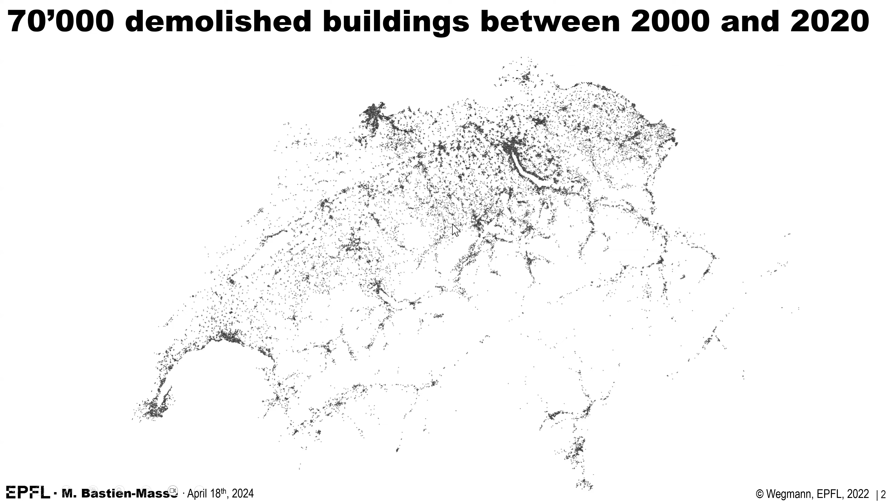This heavy demolition leads to the fact that a large part of the construction and demolition waste is made of concrete. In Switzerland and around Europe, the number is approximately the same: about 1/3 of construction and demolition waste is made of concrete, excluding all excavation materials. And obviously, the best thing we could do would be to maintain buildings in place.

I'm not going to go too much into this, but this is really something we need to keep in mind. The first thing we should try to do is to try to keep the buildings in place as much as possible, transform them, renovate them, strengthen them. There are methods that exist to assess them and modify them, etc.

But when it's not possible for various reasons, because the building does not answer the needs we have, then one possibility we should be looking at is reuse. And we really need to make the difference between reuse and recycling.

Because I sometimes still hear people using the word reuse when they're really talking about concrete recycling. When we're talking about concrete recycling, we're basically demolishing buildings using the normal standard methods we all know, and then the rubble is crushed into smaller elements to create aggregates. These aggregates can then be used to partly replace natural aggregates in new concrete mixes. This is an interesting and valuable solution to value the concrete rubble.

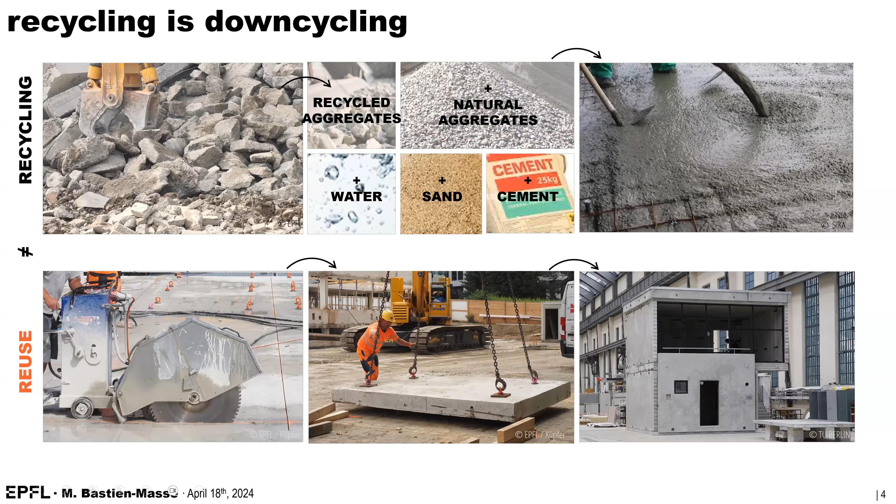This is not exhaustive, because probably some projects exist that were never published about or never publicized, but we could at least find 50 examples of built projects where concrete elements were reused. Most of those projects come from Europe, with only one or two from the US. Most of them actually come from Germany, the Netherlands, and a bit from Finland and Sweden.

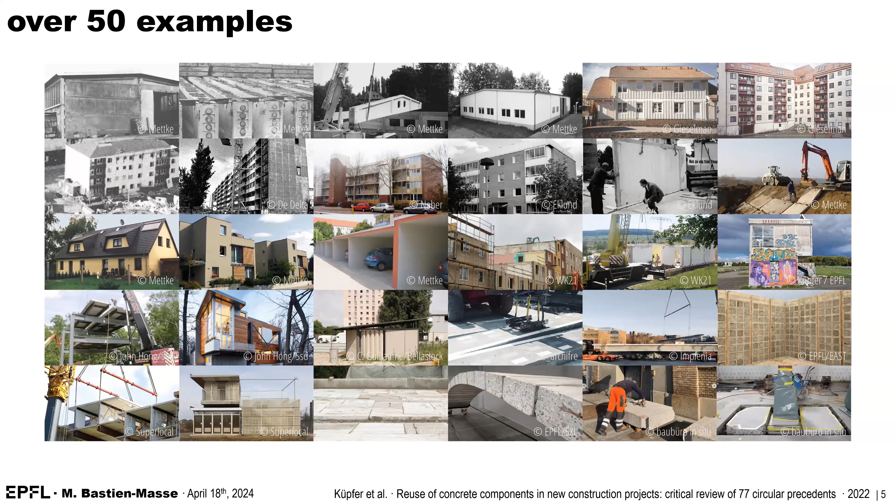And most of them concern precast elements. Why precast elements? Because it's much more obvious to deconstruct a structure made of precast elements, since the joints are already predefined and you can just deconstruct the building in a reversed way compared to how it was originally constructed — deconstructing by following the construction steps in reverse.

This is one of those large-scale examples. It dates back to the 80s, in the Netherlands, and it concerns an existing building that was under-rented, so a lot of the apartments were empty. They decided to deconstruct and make smaller the first floor of this building, and all the elements deconstructed from those first floors were reused in another city nearby to rebuild similar structures using elements taken from the donor structure.

And those buildings that were rebuilt with those elements are still standing today. My colleague went there and took this picture, so the buildings that were reconstructed are still in use.

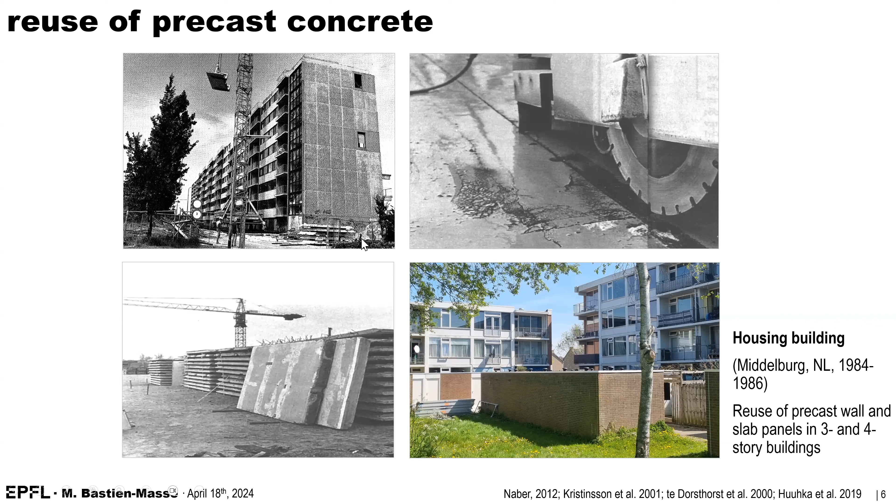But as I said before, in Switzerland we've been constructing a lot with concrete, and with cast concrete. Cast concrete really raises other questions because there you have no joints, no predefined joints. So if you want to deconstruct it into pieces, there's a whole new set of questions that appear.

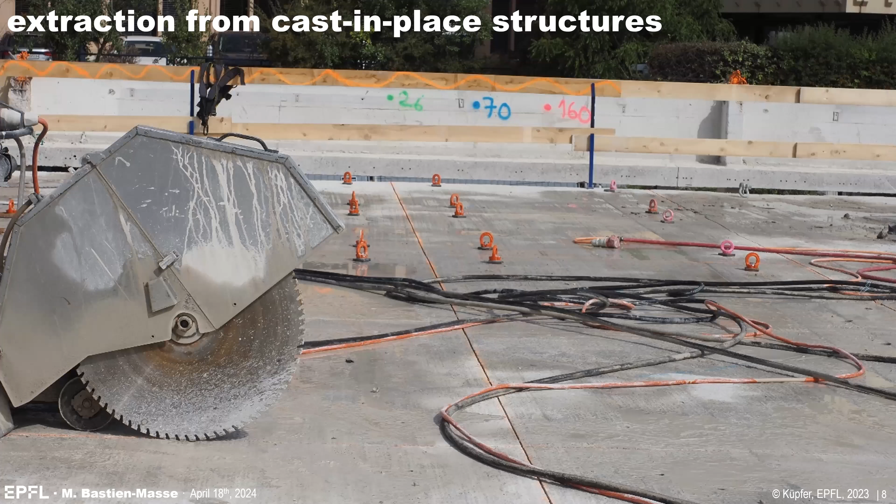First, there's the tools to deconstruct. Most of the time when I talk about elements extracted from cast-in-place concrete structures, I'll be talking about elements that are saw-cut from the existing structure, using diamond blades like the one you see in the picture.

This reuse of cast-in-place concrete structures has raised interest in the last few years. We've done many prototypes, which I'll present later, but other people have also worked on this topic. On the top left is the RE:CRETE footbridge, which was our starting point at SXL here at EPFL to kick off our research on concrete reuse. I'll talk about it a bit later.

Then there are three other projects from other people. One is a retaining wall done by the engineering office 2401, also done within a research project of the Haute École d'Ingénieurs in Fribourg. And then there are foundations done by Baubüro in situ.

And there's also this very nice example from the Netherlands, from Superlocal, an architectural office that has been doing reuse for some time, where they reused complete frames that were initially rooms in a building and used them to rebuild two types of buildings: some small house prototypes and also an exhibition.

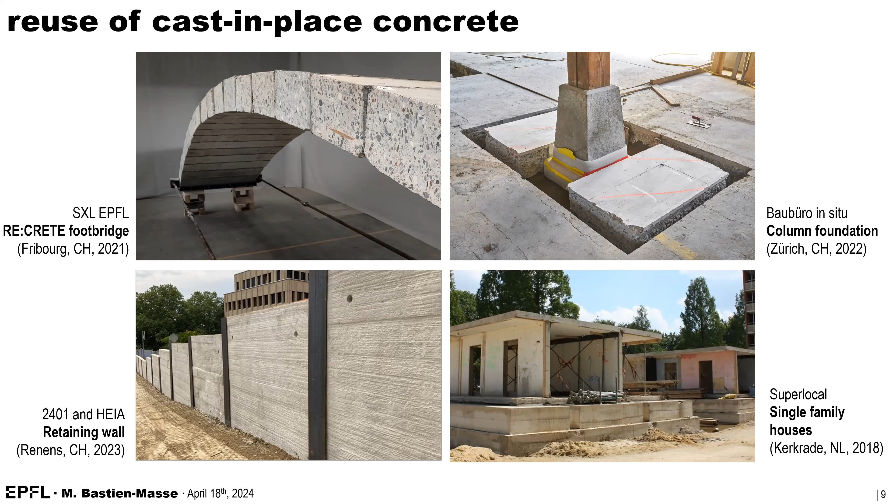This picture illustrates a student project done here at EPFL called Rebuild. The students were accompanied by us and by professionals, notably again the engineering office 2401, and they reclaimed large elements to rebuild with them. It really illustrates well the interconnectedness between the donor structure and the receiving one.

It also shows that there has to be this connection, and it changes our project phases - there's a whole new set of project phases that appear between the two projects, as well as the deconstruction and demolition of the existing structure, and also the receiving structure.

The very first step that has to be done, once a structure has been planned for demolition, is an audit of the structure - in a similar way, though not exactly the same, to what you would do if you wanted to simply transform or renovate this building. Following this initial audit, you can assess whether elements of this existing structure are actually valid and useful to be reused - that's what we call reusability assessment.

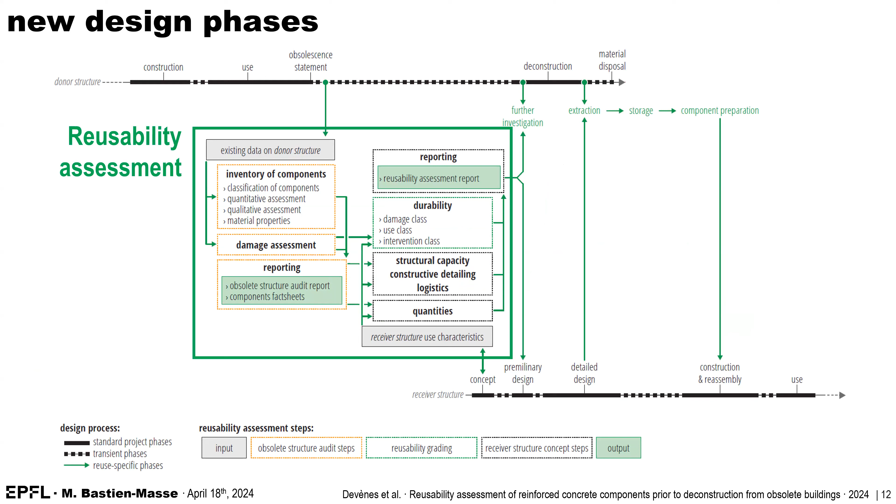So if I expand a bit more on these project phases to give you more detail: what you see here is all the steps of the reusability assessment, which we can really split between first the obsolete structure audit, and then checking the reusability. I'll start by describing exactly what this obsolete structure audit is and how we go through auditing this structure.

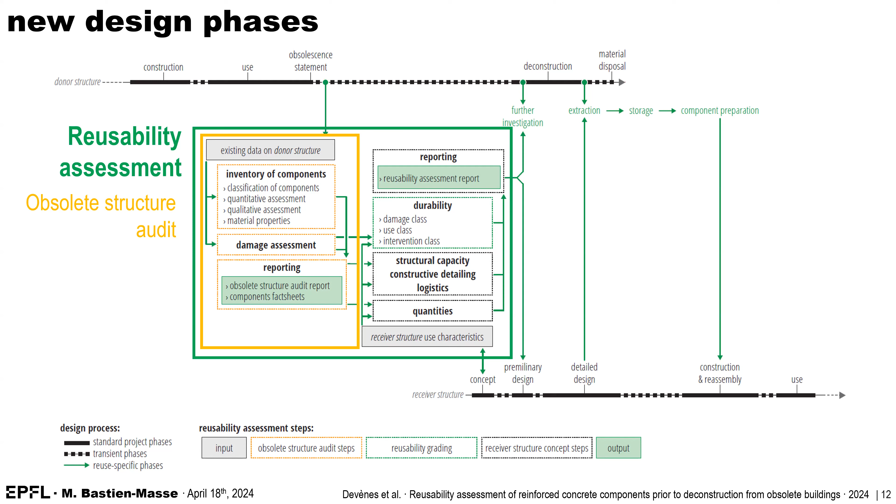So the first step, obviously, is to collect as much data as we have on the existing structure, which is not always an obvious phase.

In most cases, we'll have architectural drawings, so the basic geometry of the building. But most of the time, that's going to be the only data that we have, because it's very rare that formwork drawings or reinforcement drawings have been kept. In the same way, you won't have any info on the material properties. So you will really need to do investigation, find all this basic information that allows you to plan the structural reuse of the elements.

And sometimes you might have some issues. First analyze what you have and do a first inventory: what are the types of structural elements that you have in the building?

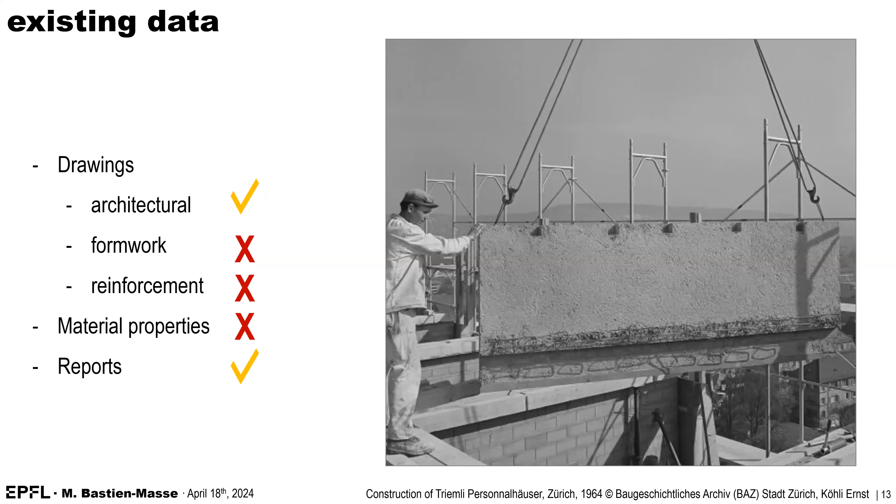Then you need to plan an investigation. These investigations can be done, and this can be investigated mainly using ground penetrating radar, but also with small local openings to verify diameters.

So more into detail on that. Carbonation is also important for topics related to durability.

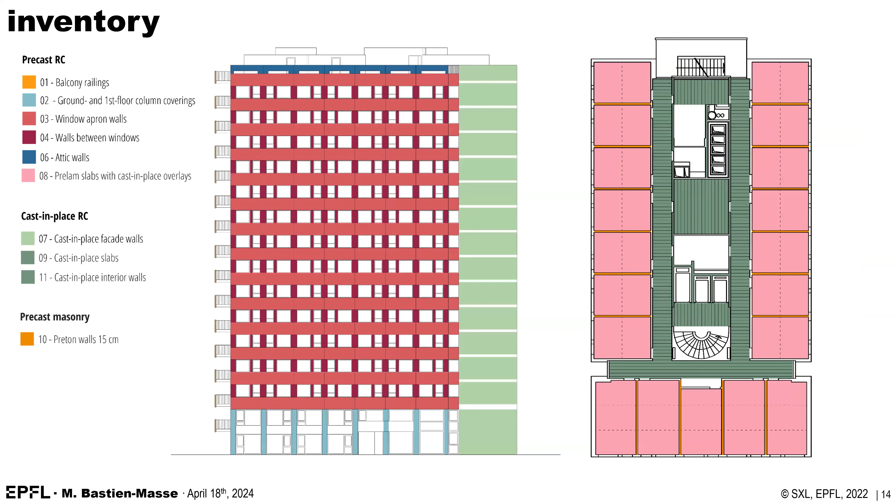Visual inspection is an important step of it. It's the step where you check whether there is any existing damage on the structure. It's something that is routinely done, or that should be routinely done, on most structures. It's done more frequently anyway on bridges and infrastructure in general.

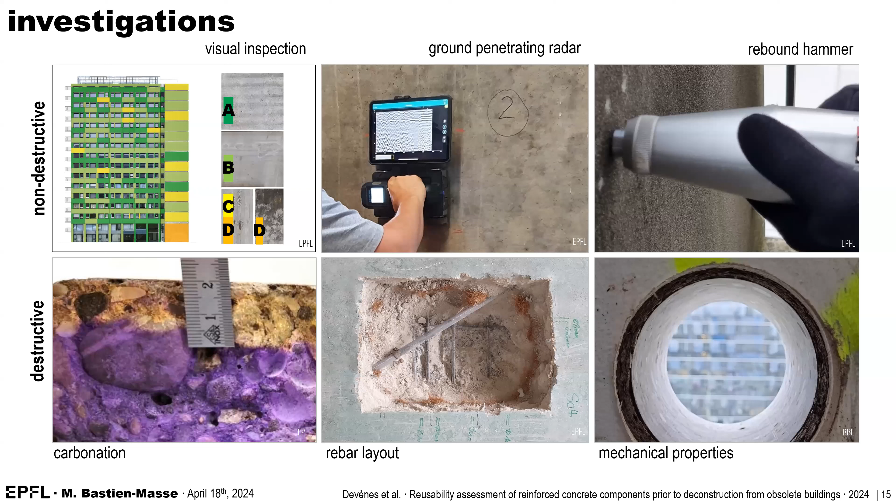And we proposed a grade scale to grade the damage that appears on the building. It's very simple. It depends on how heavy the damage is and what type of behavior it will affect - only the durability of the elements, or might it affect also the structural capacity of them?

This is inspired by what is already frequently done in infrastructure inspection.

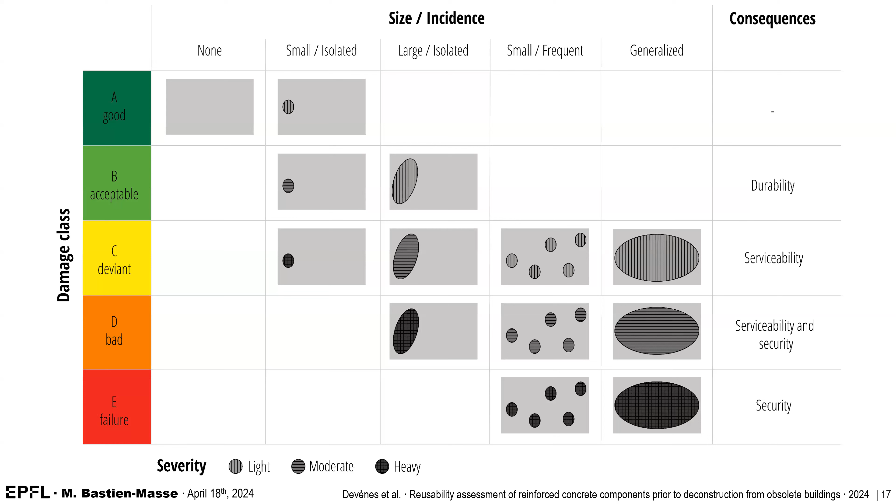Once you've collected all this data - first info on the material properties and then info on the damage and the states of the elements - with the data you collect on the reinforcement, you can try to assess what you think there is, as you do like a retro analysis to verify what is the expected reinforcement in the structure.

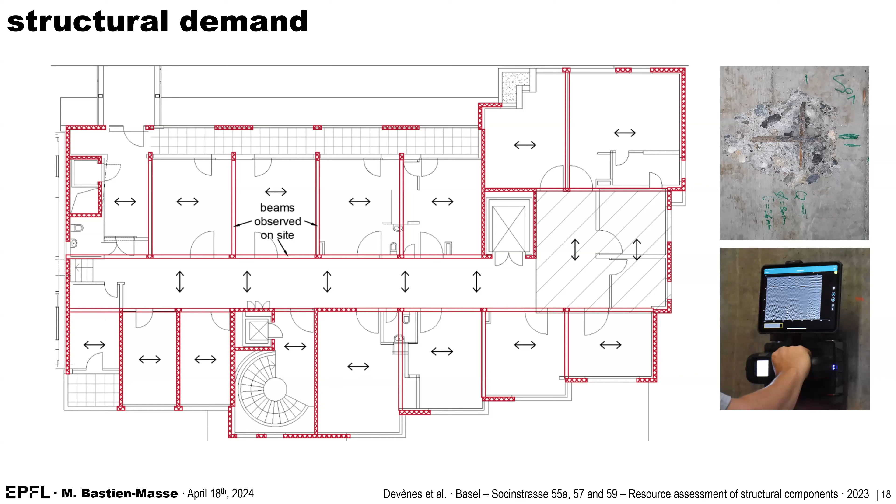So based on the measurements you did, plus maybe some small openings, which should be limited to the maximum, and on the knowledge that you have on the existing structure, the idea here is to try to find what should be the minimal bending moment resistance of the existing elements.

Once you've collected all this data, we propose to bring all this data into fact sheets. We have a template that looks like the one shown here, but the goal is really to have all the important info in one place, and then this info can easily be used by designers of the receiving building. You will really have all info regarding dimensions, structural properties, material properties.

You can also add in there any other info that would relate to any pollutant that could be suspected on the elements.

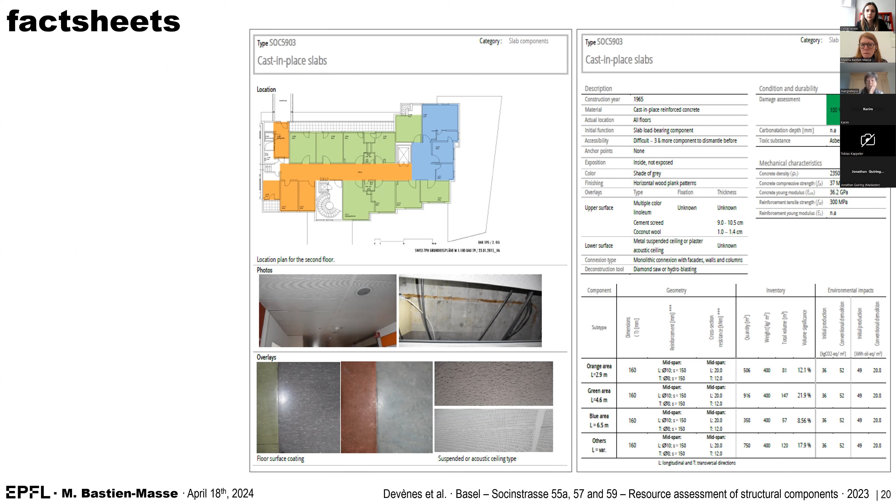Okay, so once you're done with the audit, it includes damages - sorry, the idea is to see the damage that you assessed, that you did before, and to reflect on what it really depends on, how structurally solicited the elements will be.

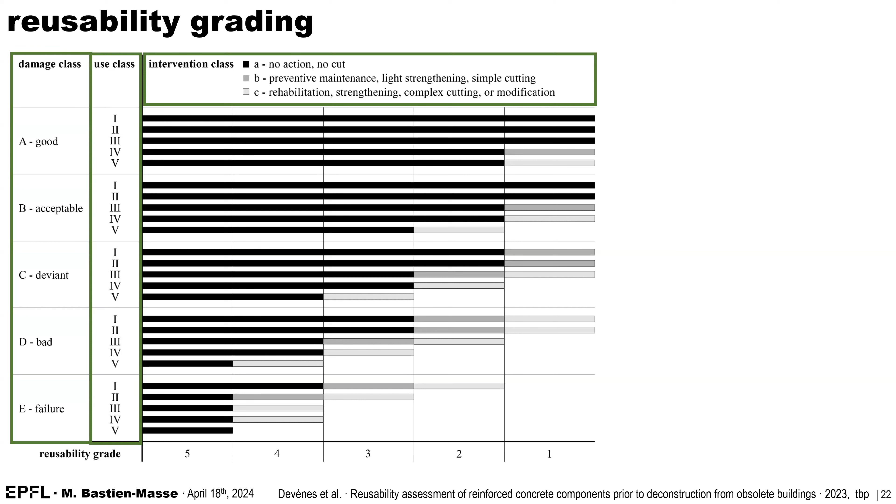So in some cases, you can have elements that will have almost no structural load, and the more you go high in the use class, the more structurally demanding the new use will be. And then you can also plan interventions on the elements, or plan action on that, and that will also give another level of scale. With those three different factors, you come to a reusability grade that you put between 1 to 5.

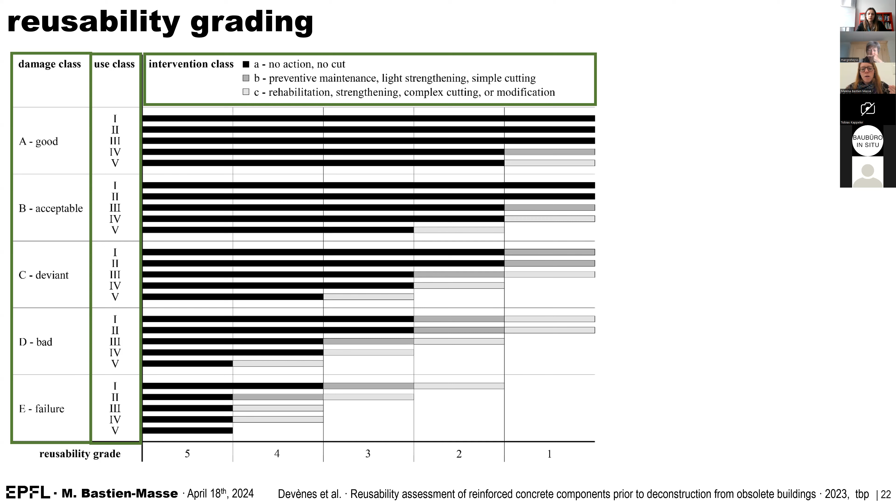At the beginning, there is no predefined joint in the concrete structure, so you really need to find how you're going to saw the existing structure and create the elements that are going to be the most useful for your future project.

In some cases, like this example, which is a building that we assessed in Basel, it can be quite simple. So you might have a receiving project that really needs very symmetrical elements, and you also have a floor plan of the donor structure that is very regular, so it's quite straightforward to define the sawing pattern.

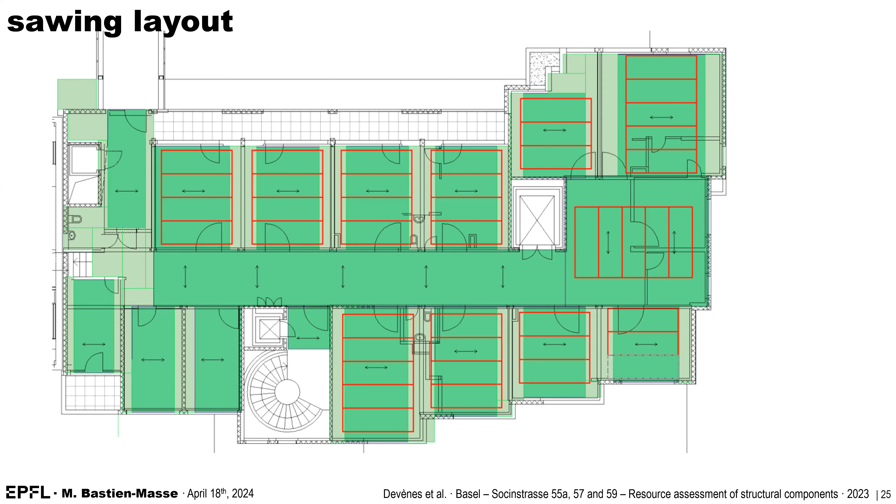But in some other cases, it might be more complex. This is the case of a case study that we did here, where we had a donor structure with structural capacity that was not so regular for the slabs, and we had a receiving building that was also not so regular.

So in this case, we had to use an optimization algorithm to find the best sawing pattern for the donor buildings, to find the best way to extract the elements that were required into the new building. And the goal was also to minimize as much as possible the strengthening that was required on those elements.

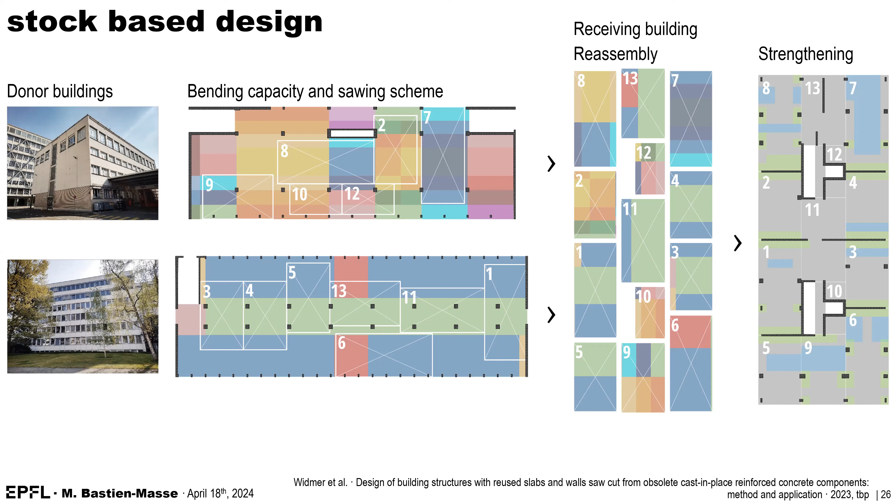This was a case study where we really tried to go all in, in the sense that we wanted to do a project where we would only do concrete reuse. All the walls, all the slabs would have been done with reclaimed concrete elements. But you'll see, as I go on, that other solutions are also possible.

And then once you've decided where your elements go, you can go into the detailed design, and that implies the development of new connections, because of course those elements that are saw cut need to be reconnected together, and this is really not straightforward.

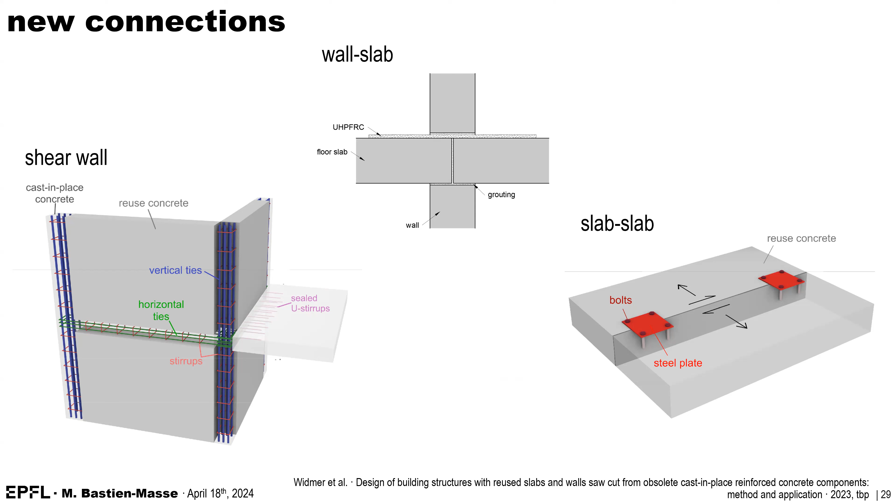I'm not going to give you too much info about those connections, because this is really ongoing research at the moment. We still need to find the best way to reconnect the elements. There's some structural constraint due to the fact that the rebars are cut, so you don't have the continuity that you normally have in a reinforced concrete structure.

So here, there's still some questions that are there, but it's really just a matter of designing those connections correctly. Once you've decided what's your sawing plan and how you're going to reconnect everything, you can actually plan the deconstruction. I said it already that it's done using diamond saws and a lifting machine.

And then once the elements are extracted, they should be inspected once more before they are reassembled in the new building to make sure that there's no new damage. Here, the non-destructive tools can be used again to verify that the assumptions you made on the structural capacity and on the reinforcement layout are correct. So it's another way to validate all the info you collected when you were doing the audit on the existing building.

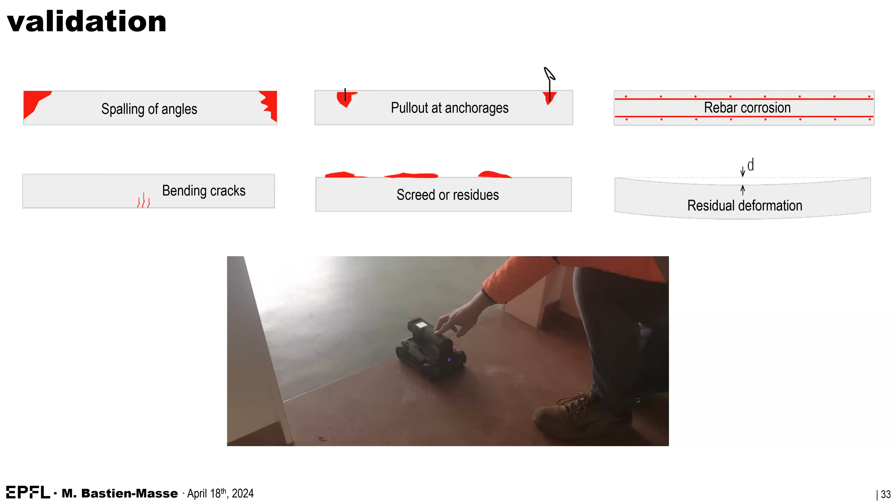So that was me trying to give you insights on the whole design phase. It was just really to illustrate how the project flow can go, and how it's a bit different from usual project flows, because you're starting from an existing structure to build a new one. It's not like when we're starting from a blank page.

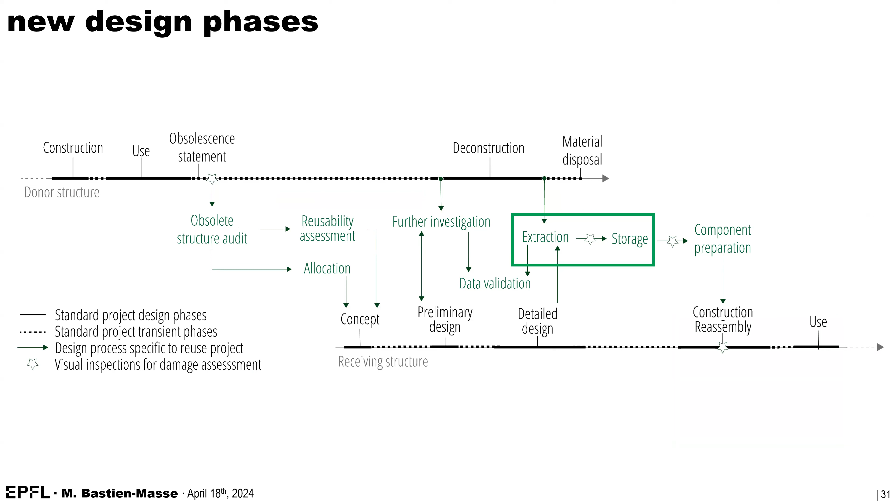And now I would just show you some new structural systems that we've developed here in the lab, and also some prototypes that were built to validate those differences.

So one of the main topics that we tried to tackle is the construction of floors, because floors and slabs in buildings are responsible for the most embodied carbon in the whole structures of buildings. And so one of my colleagues here developed a system where she tried to make the best out of the existing spans of an existing building to build a new floor.

And she proposed two systems. At the top, if she has elements that are long enough, then she would take those saw-cut elements, those reclaimed elements, and simply place them over the walls of the new building.

And if you would wish to have a longer span, then the reclaimed element can be combined with steel girders. And those steel girders can either be taken new, or they can be reclaimed, which is even better because it lowers even more the embodied carbon of the new building.

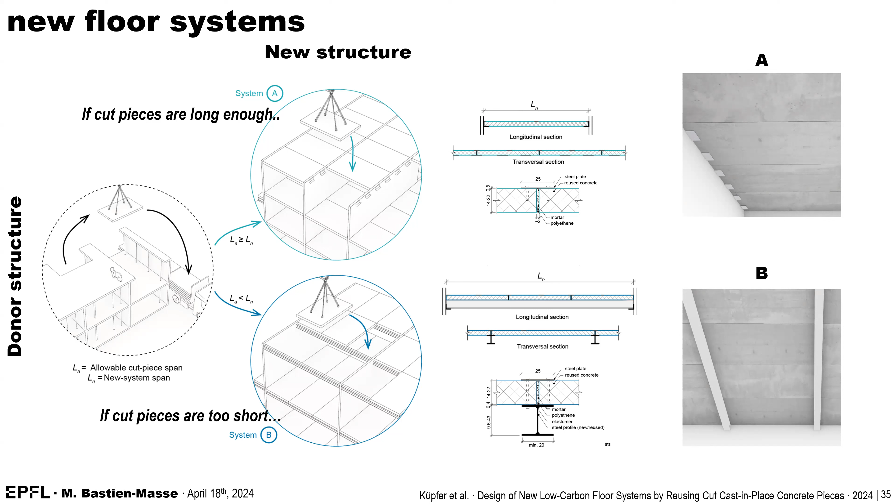She did some case studies again to verify whether our initial hypothesis that it actually lowered the embodied carbon was correct. And she did a test for her floor with a 3-meter floor system, where she just puts the elements over the walls. In this case, she has a reduction of 84% of the global warming potential when compared to a conventional flat reinforced concrete slab.

And in the case where we combine with steel elements, she goes up to 6 meters of span. When we're using new girders, we have a reduction of over 70% of the global warming potential. And with reused steel girders, we even have a higher reduction, and it goes down to 88%.

In general, these are really the numbers that we can achieve when we're using concrete elements. And when we compare it to similar structures that would be built with new concrete, what we see is that we always end up with reductions between 70 and 90%. So it's really significant, really important reductions.

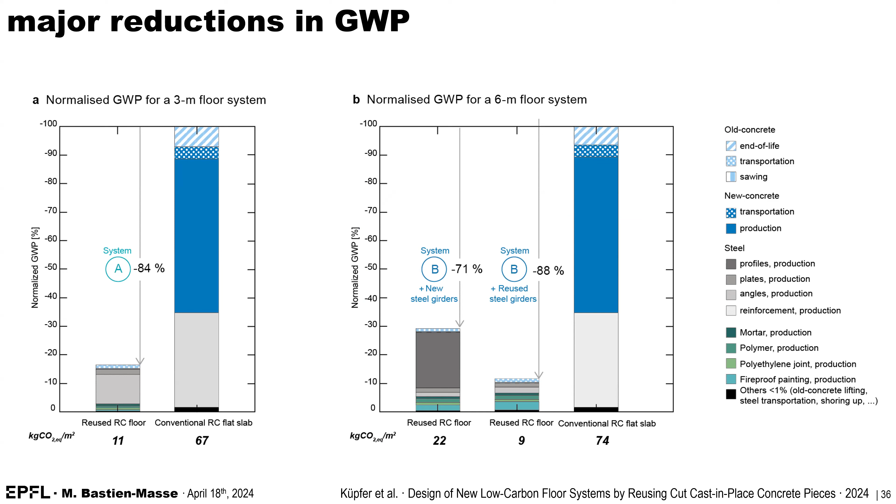And also you might ask yourself, what about transportation? Because that's always the argument that people take. But in reality, what we see is that the reduction in global warming potential is so high that, in Switzerland at least, we could transport those reclaimed concrete elements across the country and still have some important gain in terms of global warming potential.

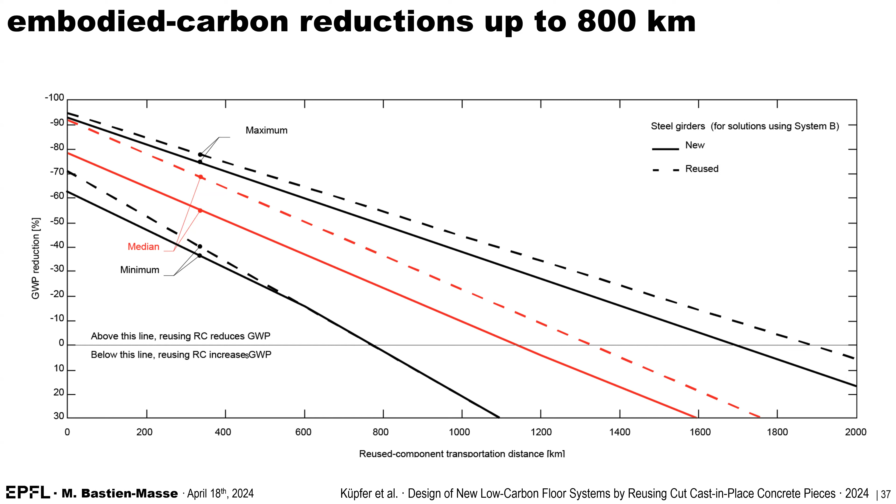We prepared a pre-designed tool to help you design this new flooring system, where you can input info on your donor building and also info on the span you wish to have. And you can do different design alternatives. The goal of this pre-designed tool is to give you first insight on the global warming potential gains that you can have, depending on the design choice that you make.

This is an online applet that we're trying to finalize now. Hopefully we will be able to post it online before the summer, so that you can quickly do some design and test whether it makes sense or not to reuse the slabs from your existing building into a new building.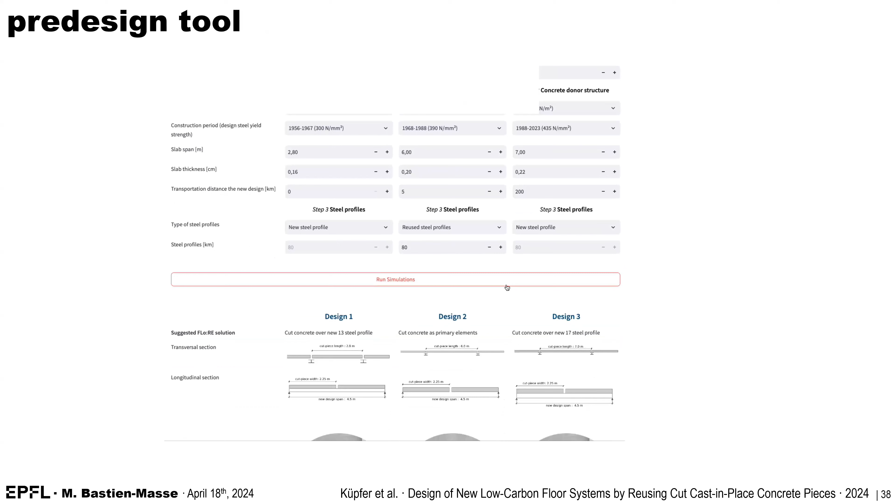So here she runs a simulation. It proposes this constructive system, and then it gives you some first numbers for the global warming potential reduction.

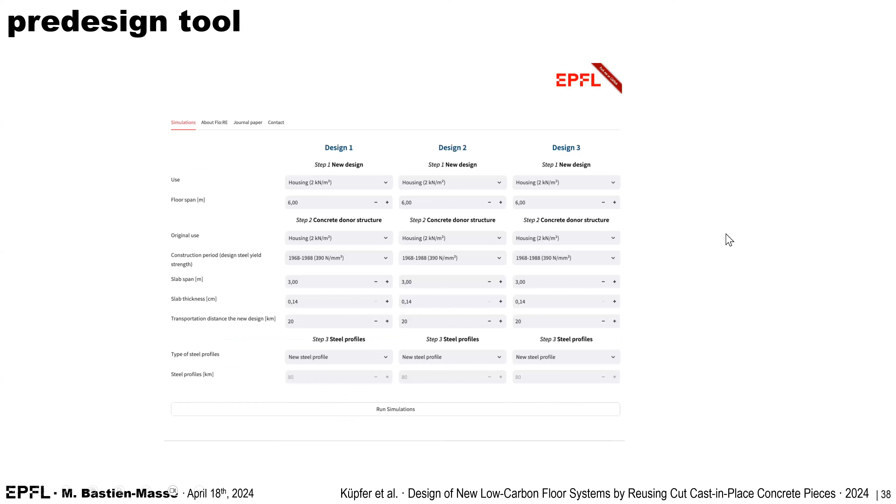Now I'm not too bad with the time. I just want to quickly go through different prototypes that were recently built, because up to now I was very theoretical, but I want to show you that it's actually possible, and it's also possible to use all the scales of elements from a building that's about to be demolished. So really, we built some prototypes that go from the rubble pieces all the way to large assemblies. I've already talked quickly about this project.

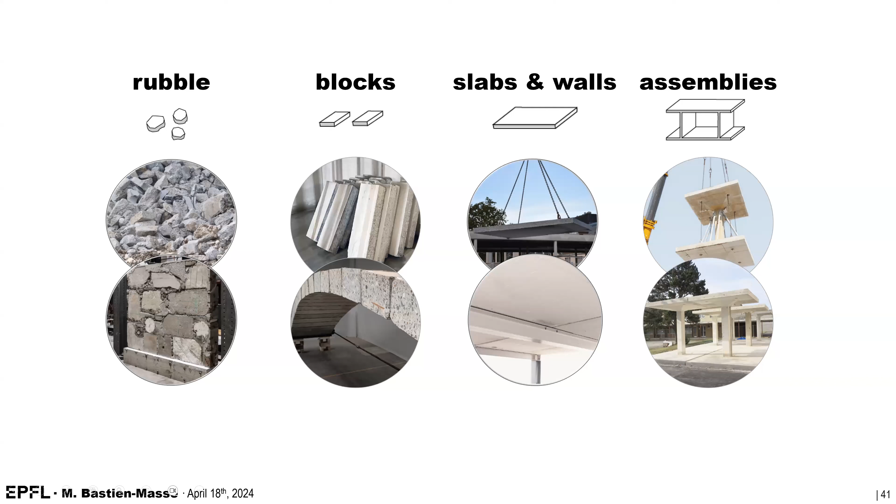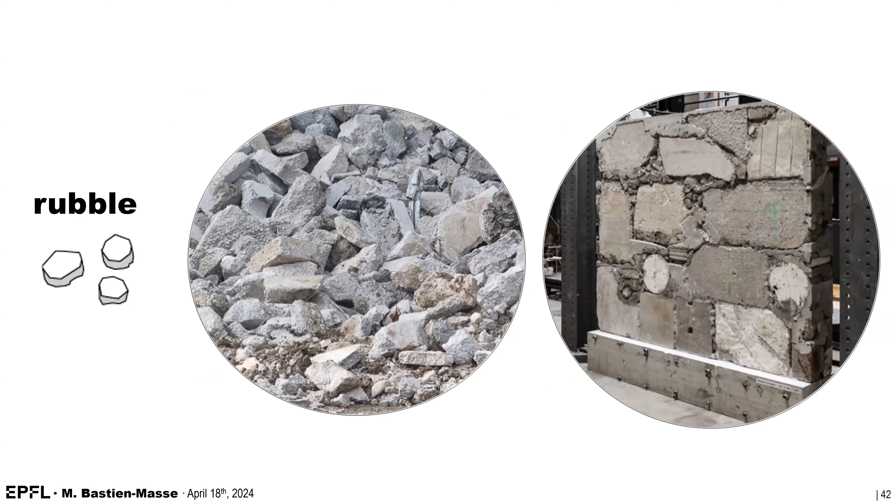I have a colleague that's trying to find new ways to reuse rubble pieces, to make the best of the elements that come out from traditional demolition. What he's proposing is to use digital methods combined with traditional tools from the construction industry to make the best out of those rubbles.

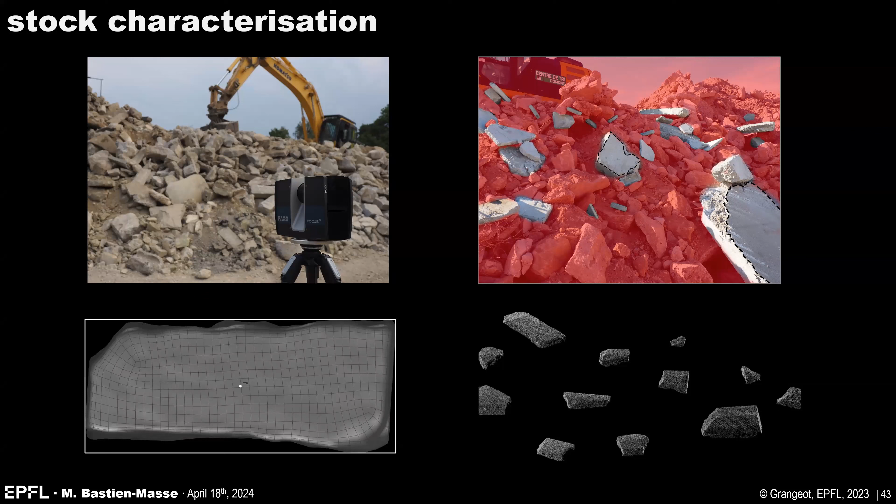Of course, it starts with stock characterization, to understand a bit better what the stock of rubble is made of. And then some packing algorithms are used to make the puzzle with all those pieces that we have, and create a wall that has as little opening as possible.

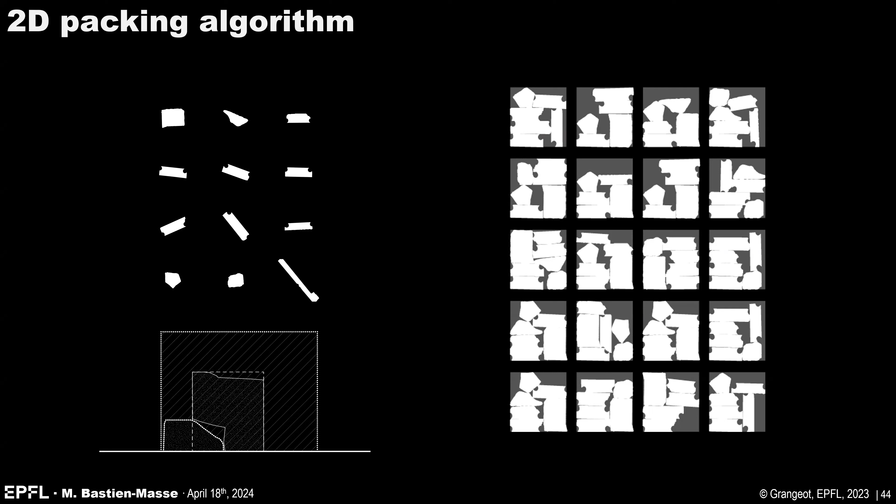And that will work like an irregular masonry wall. Then he proposes to have anchoring points that are placed very wisely, so that when the elements are lifted, they will come into the right position that was calculated by the algorithm. They will quickly come into the right position and it will be easy to place them. So those anchoring points are calculated automatically.

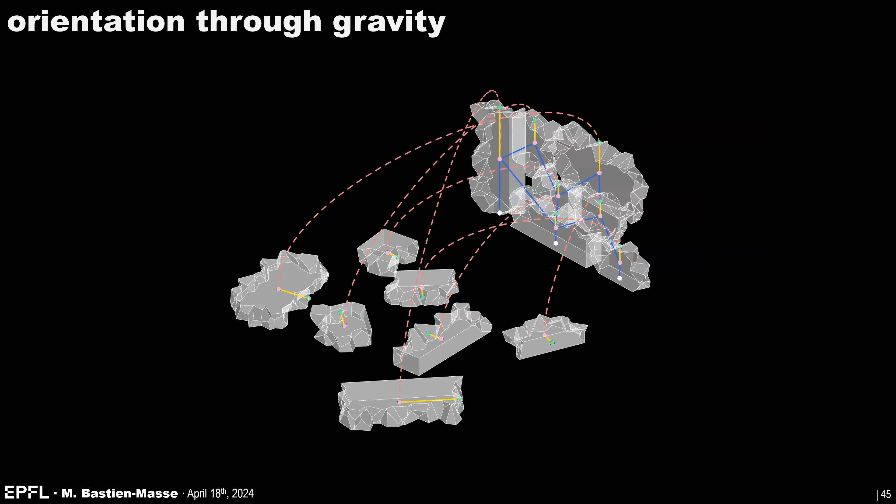And then, well, we're using a robot, but we want to find ways to make it easier on site and not necessarily have the need of a robot. We're using a robot to precisely place those anchoring points.

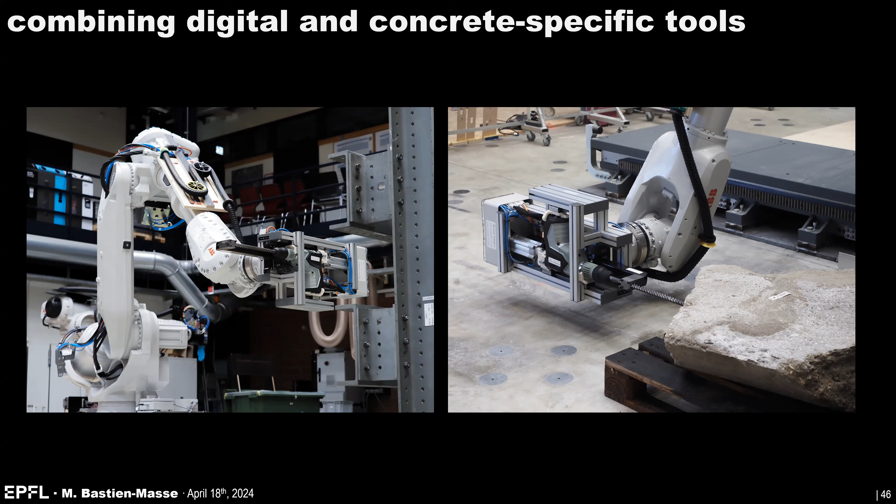And then he built two prototypes: a first one that was more of a sculpture, which still had a large opening. And then this second one that is more relevant, that really looks like an irregular masonry wall, and that we've load tested, and it behaves as expected for load bearing.

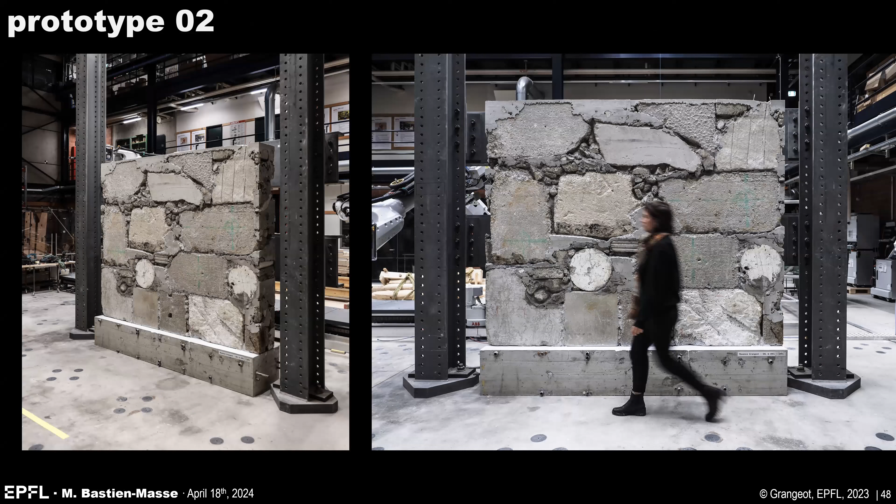And then I'm quickly going to go to the reuse of blocks, because these are projects that you might already know. This is a project that has been done in the canton of Geneva by FAZ Architectes, where they reclaimed elements, saw-cut elements from a neighboring construction or transformation site.

And they did a pavement. We estimated that this pavement probably saves up to 57% of the global warming potential compared to a pavement made with bituminous overlay.

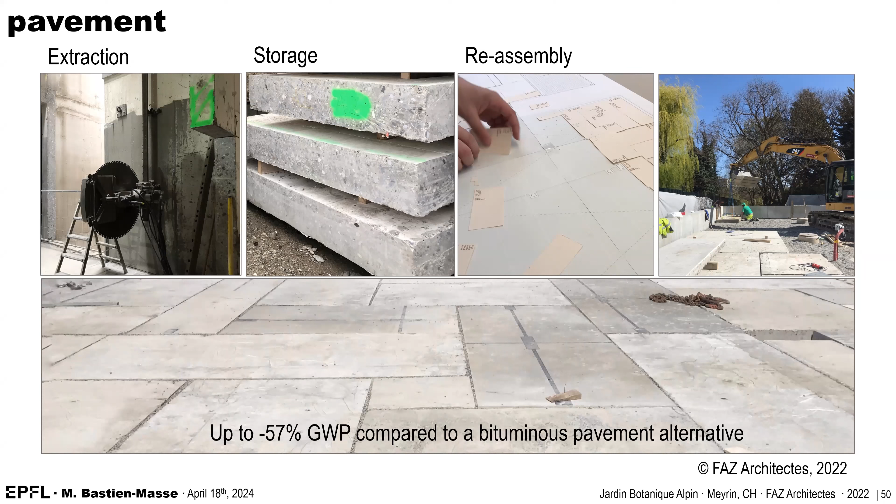And then there was this project, which I also showed quickly before, done by Baubüro in situ, where they used reclaimed concrete blocks to create the foundations for these new inclined columns. They really just put those two blocks on each side of the existing columns, and the voids were filled with concrete. They estimated that in the best case scenario, they could save up to 49% compared to a foundation that would have been cast with new concrete.

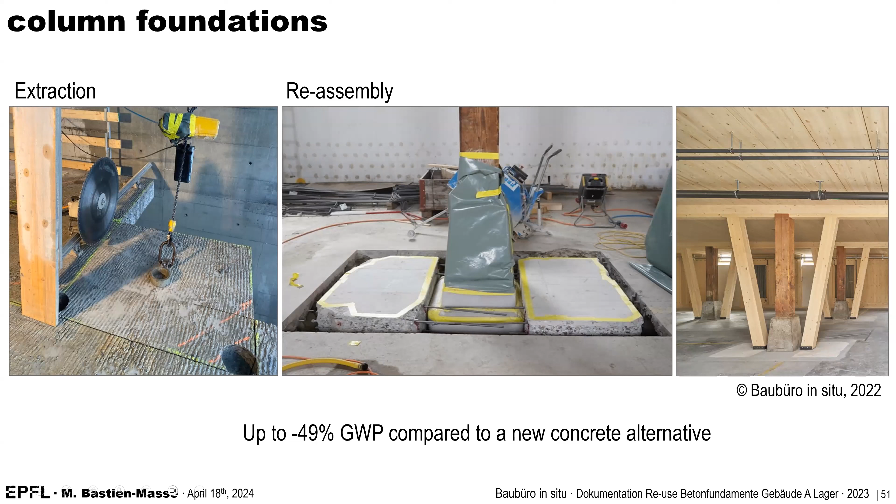And then finally, for the reuse of blocks, we have the Re:Crete footbridge, which makes the best out of the compressive strength of the concrete — that's why we had chosen an arch. We had also done the life cycle analysis of this footbridge, and we calculated that we were saving about 70% of the global warming potential compared to the same alternative made of new concrete, which brought us to values similar to the ones we would have had if this arch had been built with glued laminated timber.

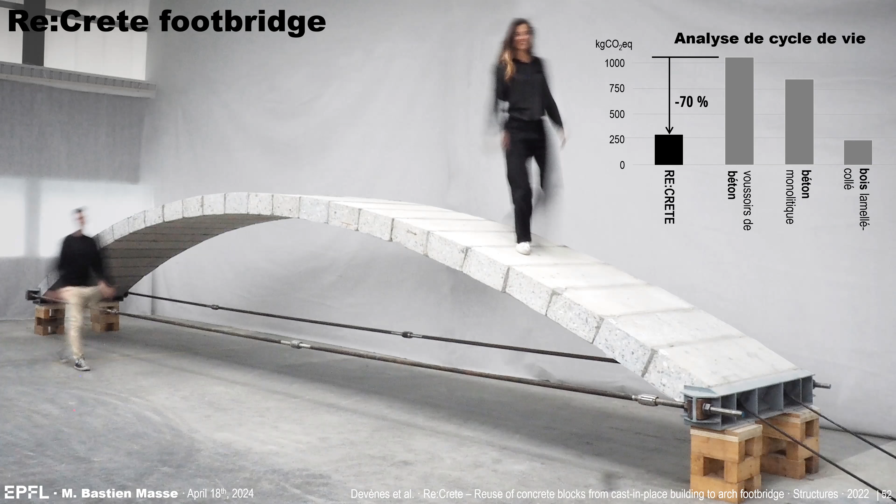The bridge is now installed in Valais, but soon, in May, it will come back to Fribourg, where it will have its permanent localization, its permanent position.

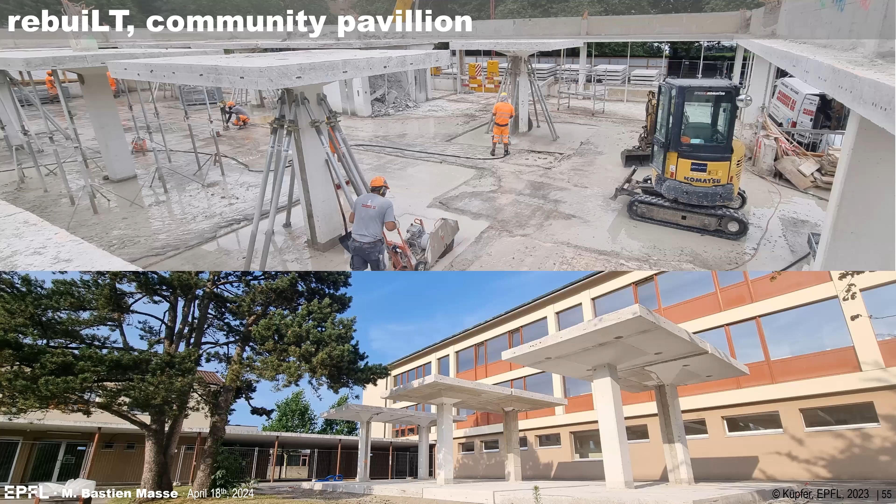So this image you've already seen. As I said, it's the student project where they reclaimed whole modules made of two slabs connected with columns. They used those modules to create the volume of a small pavilion.

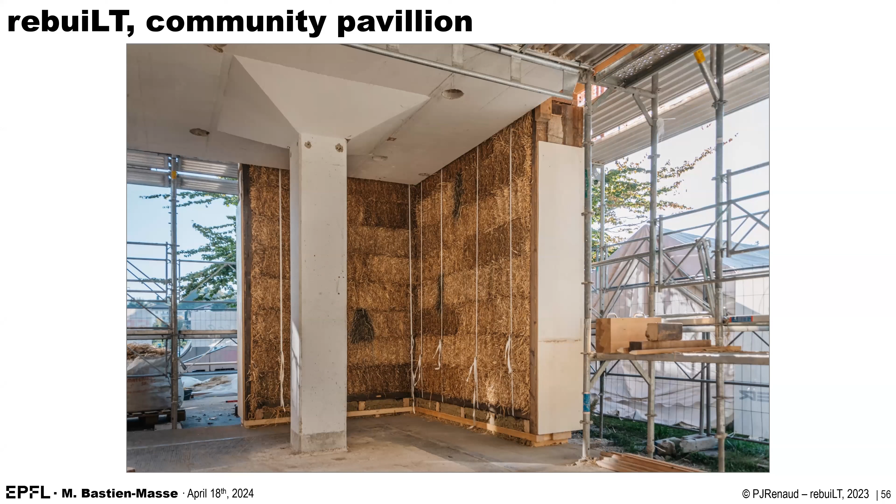They're really experimenting with all the low-tech techniques. They're currently also building straw bale walls with some clay layering. You can go visit this building, this pavilion, if you're interested.

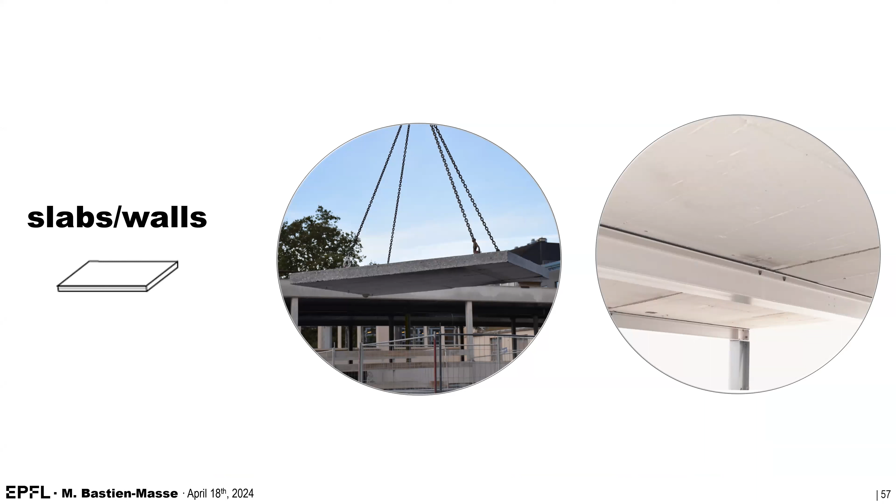They regularly organize site visits. And finally, we also tested our slab system that I showed earlier. We created a prototype, a 30 square meter prototype, where we reused both reclaimed steel beam and saw-cut slab elements. The steel beams came from an industrial hall that was deconstructed right beside where we have our offices in Fribourg, and the slabs came from a construction site in Geneva.

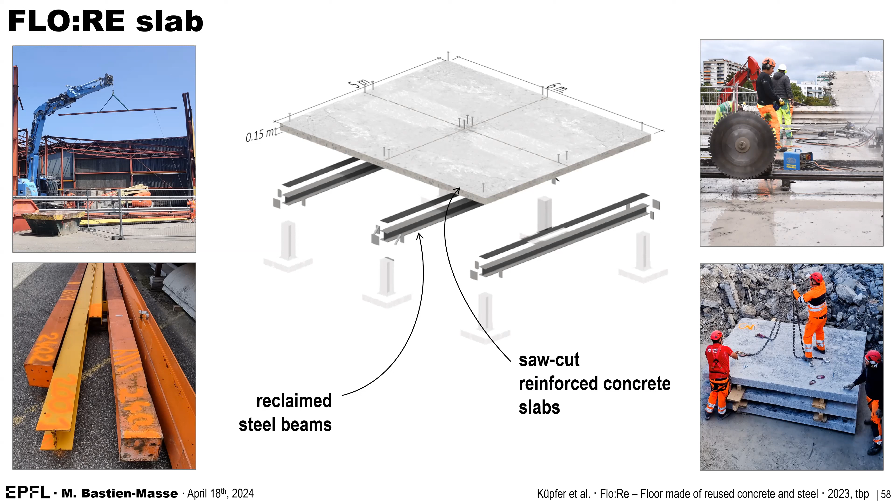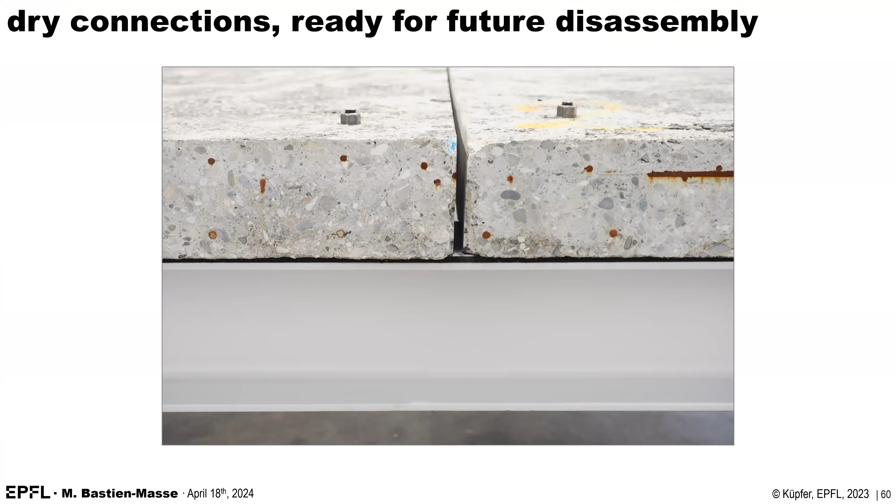We designed some connections that are dry. The elements are simply bolted to the steel elements, and the bolts are pre-stressed to ensure correct connection. It was quite quick and easy to assemble. It really brings us back to all the advantages of prefabrication construction, because you have a dry site and there's no concrete to cast on site. This prototype also validated the numbers I already mentioned, where we have savings between 70 and 90%.

So yeah, that's it for me. What I want to say as a concluding remark is that reuse of concrete is really something we should try to scale up and implement in real projects, but it's also not the only solution we could have, because at best we could only replace about 1/7 of all the concrete currently cast by a reclaimed element. That's a good thing, but we build much more than we demolish.

We also want to try to optimize the sharing of knowledge. We're currently here at EPFL trying to develop a platform to disseminate more of the info that we, and not only us but the whole reuse community, are gathering about this. So we're trying to create a platform to enhance this knowledge sharing.

And then of course there's still some research that needs to be done. We need to define better new design rules, how to actually assess precisely the structural performance of those reclaimed elements, and how to design with them. But this should not stop you from doing projects with reclaimed elements, because at the moment we can really find case-by-case solutions. It's just that we're looking to find a solution that can be more easily implemented by everyone.

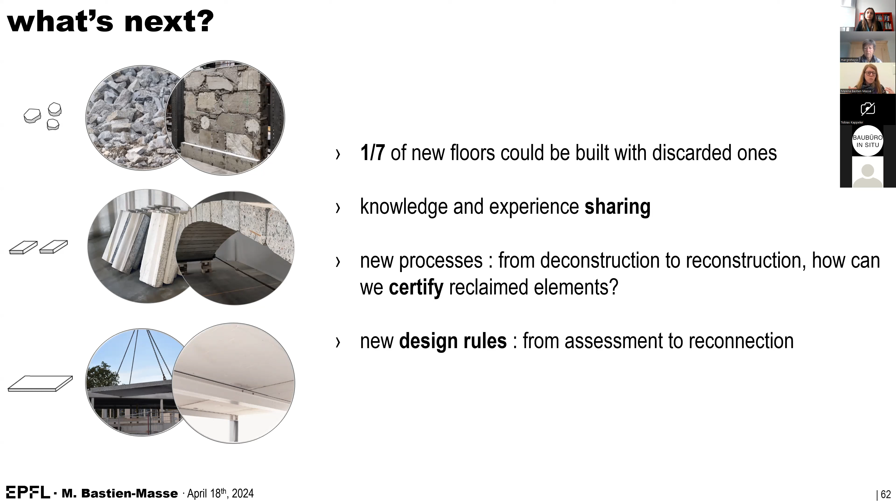In some cases it was a bit more expensive, in other cases a bit less expensive. What we see from case studies and calculations we did is that for deconstruction alone, it will be more expensive because sawing is a quite expensive operation. But if you look at the project in its globality, including the savings from not discarding the concrete and the savings from quicker reconstruction with fewer operations on site compared to new cast concrete, then you can really find balance.

That means it works best, for now anyway, for the examples we have, in cases where you have the same owner for the donor building and the receiving building, so there can be some cost flow between the projects. I hope I answered the question correctly. You can also open your mic and ask if that's easier.

In your examples you always had one donor building and one receiving building. Did you also look at cases with multiple donor buildings, for instance? Yeah, there was one example I showed with two donor buildings for one receiving building. We didn't look at this question explicitly for now because it would raise other questions such as varying thickness or similar issues.

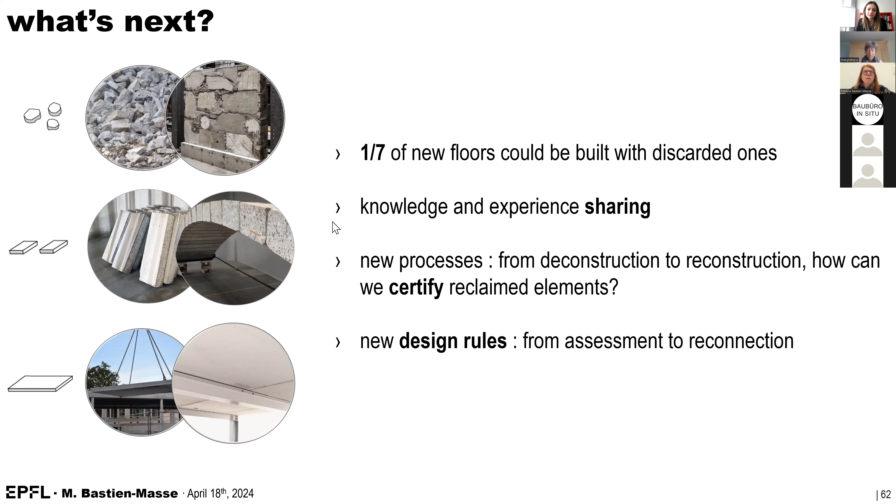I have another question about the project with the slabs set on metallic steel beams, the last one. When you compared the emissions of this project to a similar structure, did you take into account that you'd probably have to protect the steel beams against fire, whereas in a pure new concrete building you wouldn't have to do that? Yes, we did consider fire protection of the steel beams. Okay, so it's integrated in this. Yeah, okay, thank you.